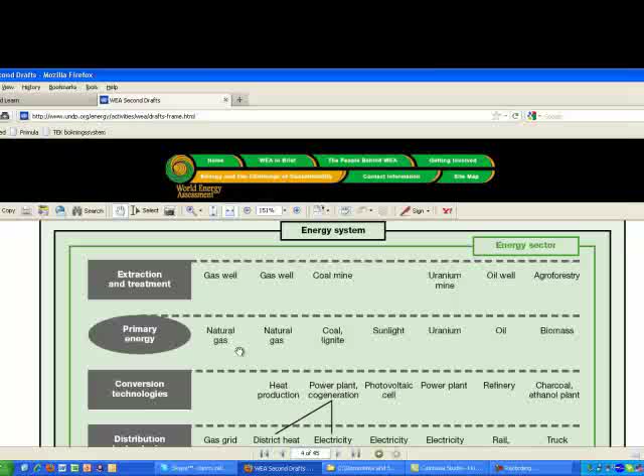Now this is Figure 6.1, which deals with energy conversion steps, types of energy and energy services, and potentials for energy efficiency. The figure starts with the raw materials, extraction and treatment of the primary energy carrier, be that gas or coal, uranium or oil, or biofuels, as noted here with the word agroforestry. The primary energy is then the biomass in our case, as shown in the right-hand side end. And that is what you shall ultimately come down to, what biomass is best used for the customer and for the customer's need. But in this course you will start from the other end. You will start from the customer perspective.

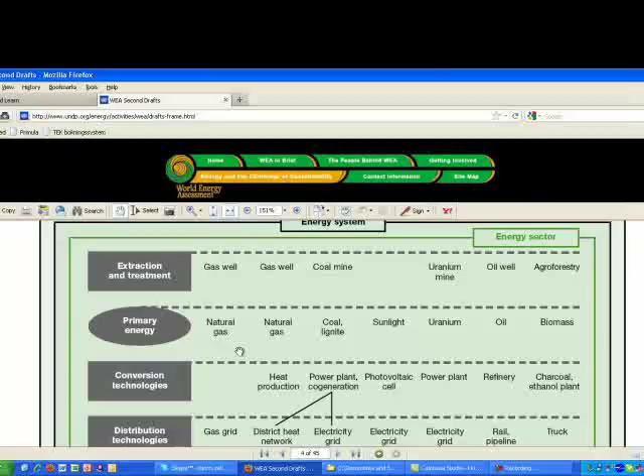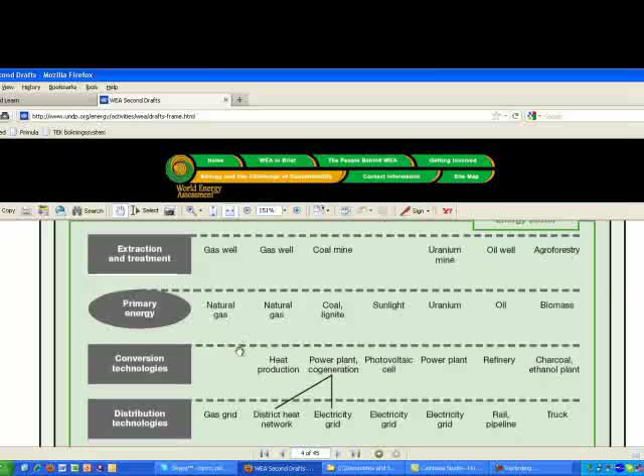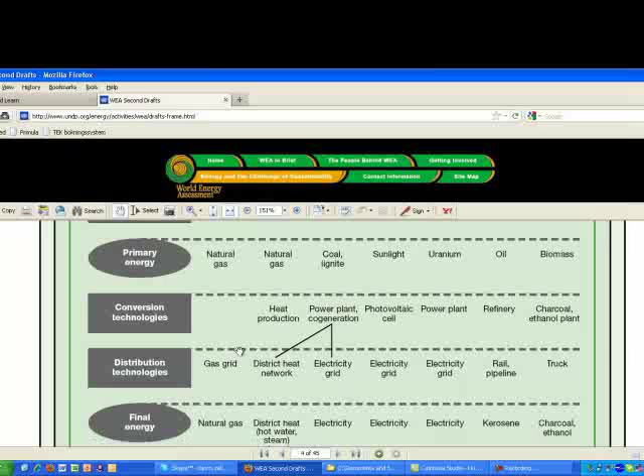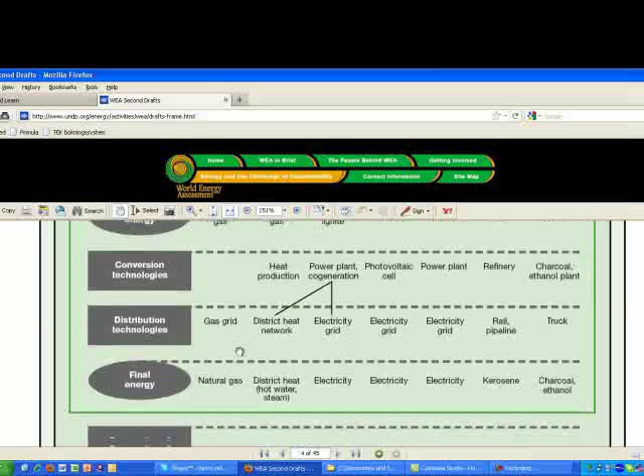Right now we will go down through this figure successively and have a look at the different steps that come between the extraction and treatment until the customer finally gets the energy. So you notice that we start with extraction and treatment. We then get a primary energy carrier, which is the biomass itself. It can be converted into something through a conversion process, which might be an upgrading, but might not be necessary. The fuel then, the upgraded fuel, must be distributed, and it can be distributed by different ways depending on the quality. And it will finally give us something we call the final energy.

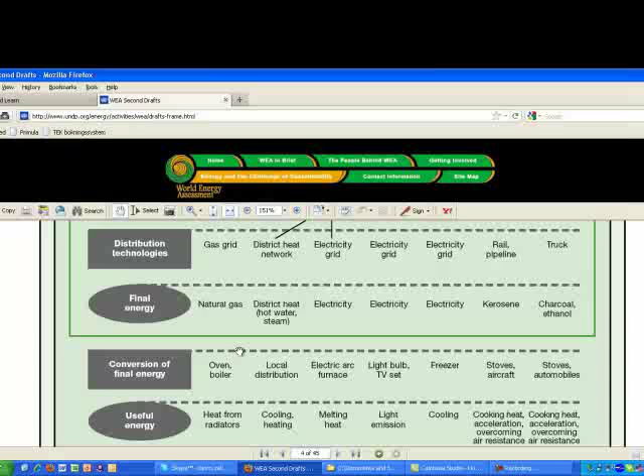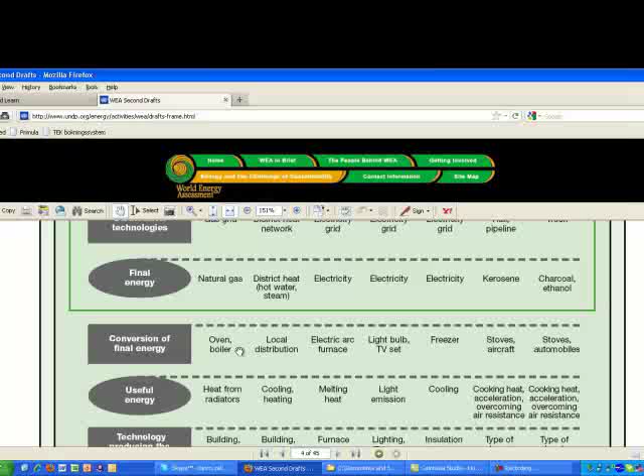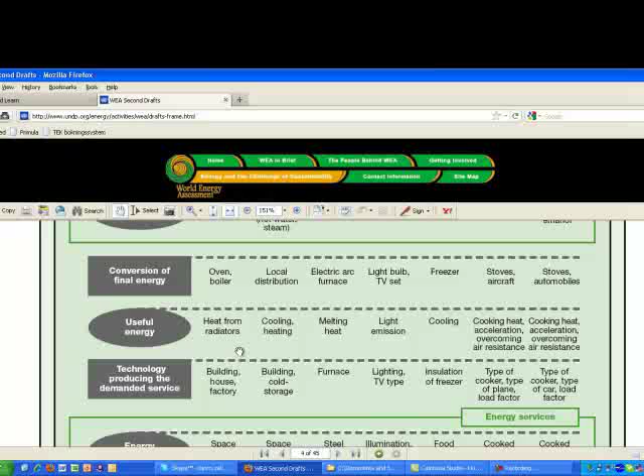You will notice the green frame that ends here. That is where the responsibility of the energy sector companies typically ends. So the energy sector will deliver a final energy, or a final energy carrier, to the customer or to a distribution network. The final energy carrier, be that charcoal or ethanol or electricity or district heat or anything else, is then converted into the final useful energy by the customer. And that can be done in an oven, in a boiler. It can be done in an electric arc furnace, a light bulb, TV set, a freezer, a stove, or anything.

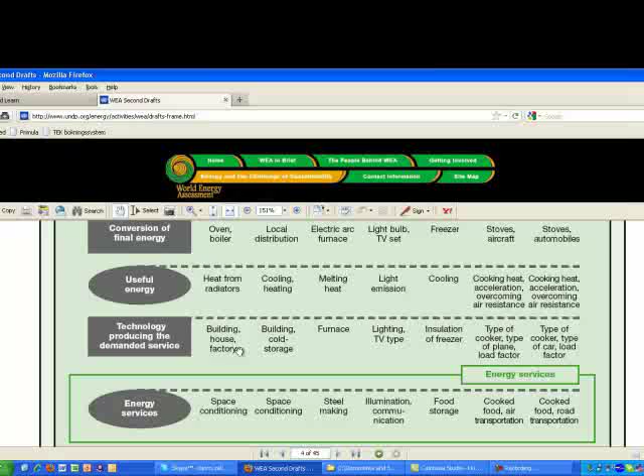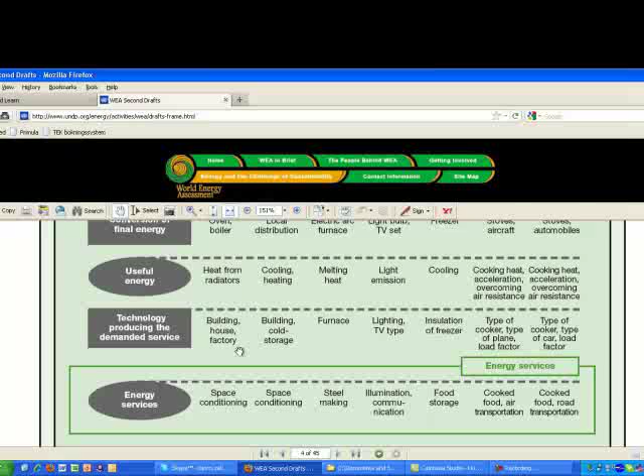That gives the customer a useful energy, which is then heat from radiators, or cooling, or heat for melting of metals, or maybe for burning ceramics, or maybe cooling, or something else. This is still not what the customer ultimately wants, but at the bottom line of this picture, you will now see what the customer actually wants, and that is an energy service. The customer might want space conditioning, space comfort heating, indoor climate. The customer might want to make steel, or to have molten steel, molten glass, or burnt ceramics.

The customer might want to have food preservation, or maybe cooked food. The customer wants a service. The customer does not want energy as such. So the customer will have a need of an energy service.

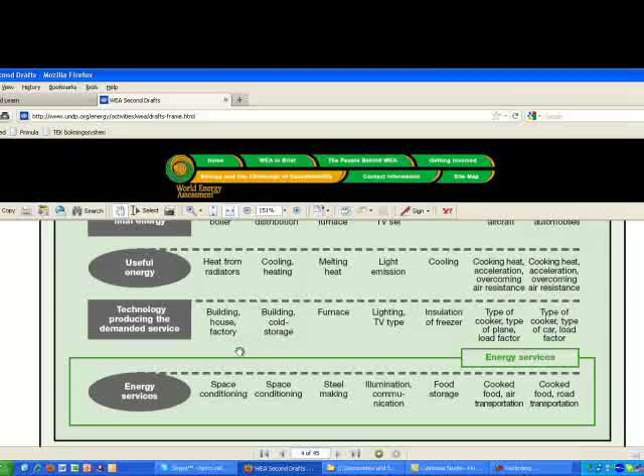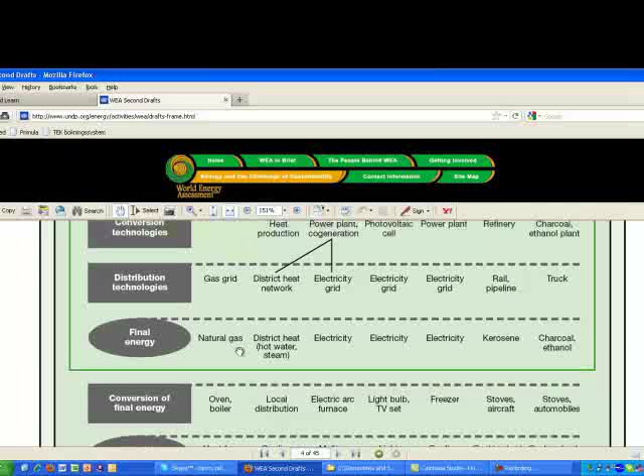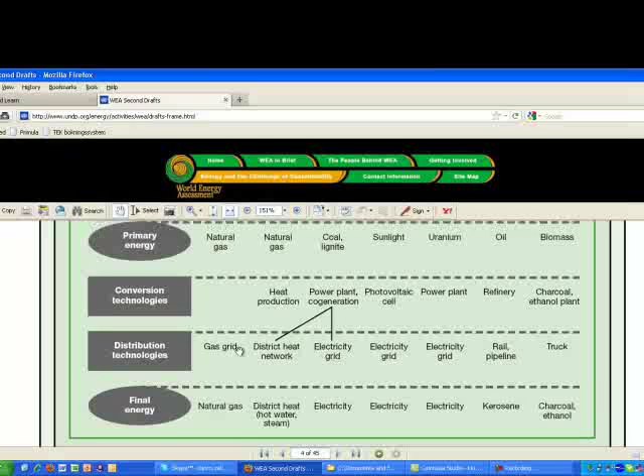The customer might or might not have some kind of a conversion apparatus for the conversion of final energy carrier into useful energy. That apparatus, that machine, whatever it is, that equipment, might be fitted for a certain type of energy carrier. That energy carrier might be best produced using a certain conversion technology. That conversion technology might be best suited for a certain primary energy carrier, which will then go back into what kind of raw material shall be extracted and how it shall be pre-treated to fit the final need.

So what you shall do in this course is that you shall work your way through, starting at the customer need of an energy service, and you shall go all the way back through this chain to the raw material that is best suited for that type of energy service. This is the other way than many people often think of energy supply systems. Very often, energy supply system planning starts with the raw material and then tries to fit the raw material into an already existing chain. But you have another situation, because you are now starting a new supply chain from a new raw material that has previously not been used to any great extent in your energy system.

So what you shall do is that you shall try to identify a market segment where the customer need is best supplied from a raw material that you have, and you shall identify the whole process chain. But you shall start with a customer perspective. What is the customer need of energy services? So the first thing you shall do in this course is to identify the customer energy services and the need of energy services. So that is your first task.

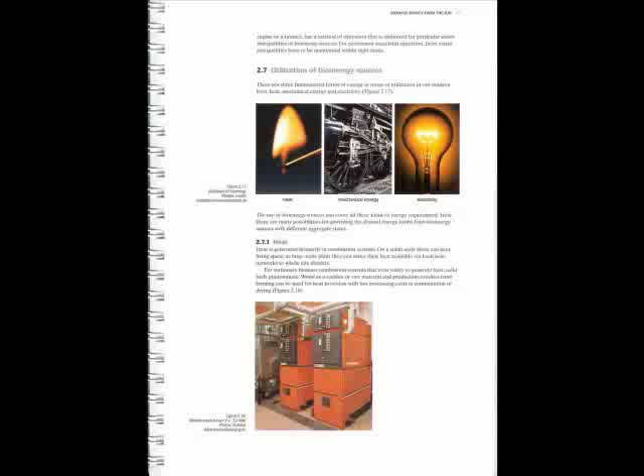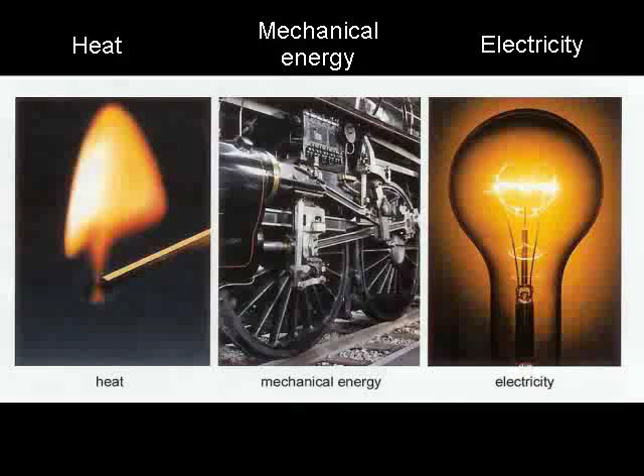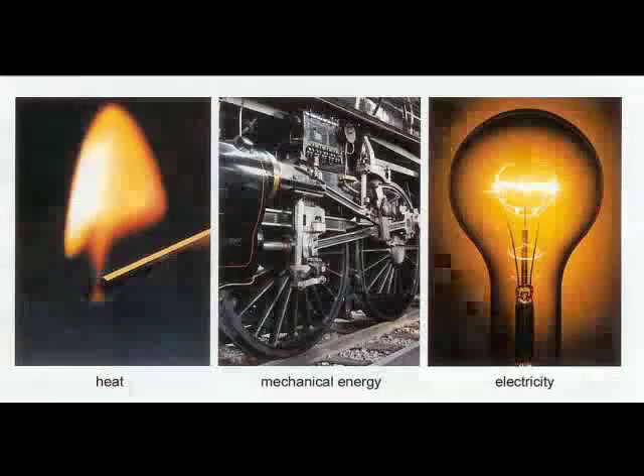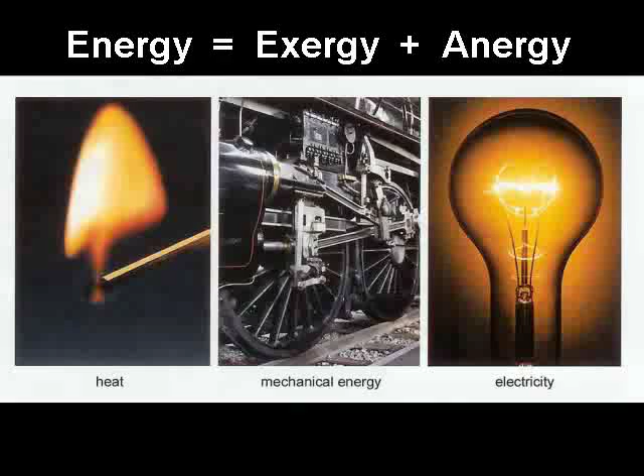The course book then defines that there are mainly three different types of primary energy to be produced, and that is heat, mechanical energy, and electricity. And then it discusses these on pages 17 and 18, but not in any great detail. We shall now have a look at the heat and see how heat can be split into different types and different qualities, and we shall introduce two fundamental thermodynamic terms, namely exergy and anergy, which are not mentioned in the course book at all, but which you need to know before you go out to try to identify the customer's needs of energy services.

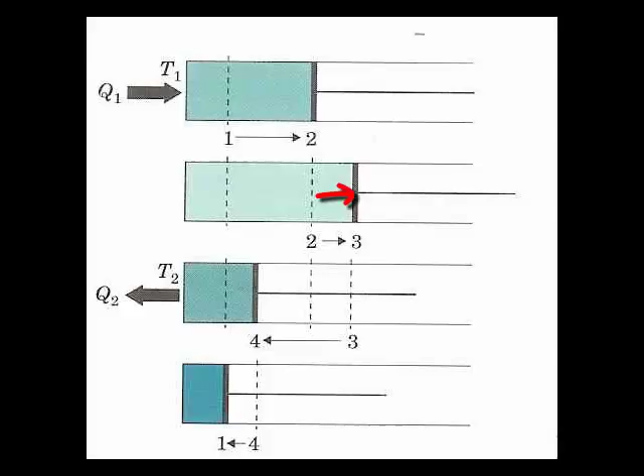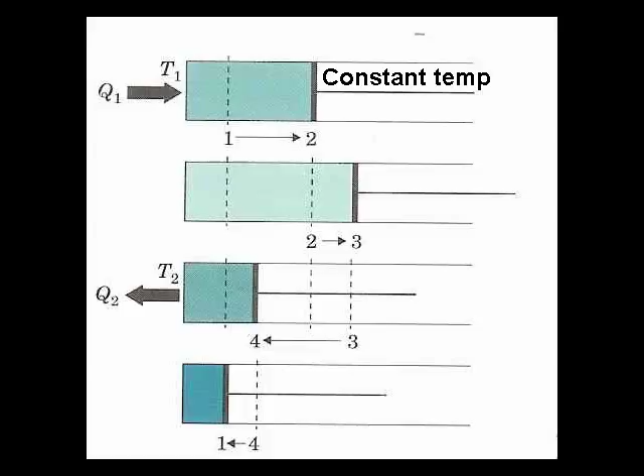As the gas is heated, it will expand, and it is assumed that the gas expands at a constant temperature T sub 1 until the piston has moved to position 2. After that, the gas is again allowed to expand further until the piston is in position 3, but during this expansion the gas may lose temperature. So the first expansion from 1 to 2 is at a constant temperature T sub 1, while the second expansion from 2 to 3 is while the gas loses temperature. This is indicated by the slightly bluer color in the diagram.

As the gas has now expanded and the piston has moved from position 1 to position 3, there has been external work done by the moving of the piston. So that work can be used theoretically to, for example, turn around a generator or something else for any kind of mechanical work.

So the piston is now in position 3 and the gas has some kind of a temperature. Now the third stage in the cycle is that we bring the cylinder into contact with the cooling source so that we start extracting temperature from the cylinder, and the amount of energy that we extract is Q sub 2. As the gas then cools down, it will shrink, and the piston will move from position 3 to position 4. The gas will now have temperature T sub 2 in the cylinder,

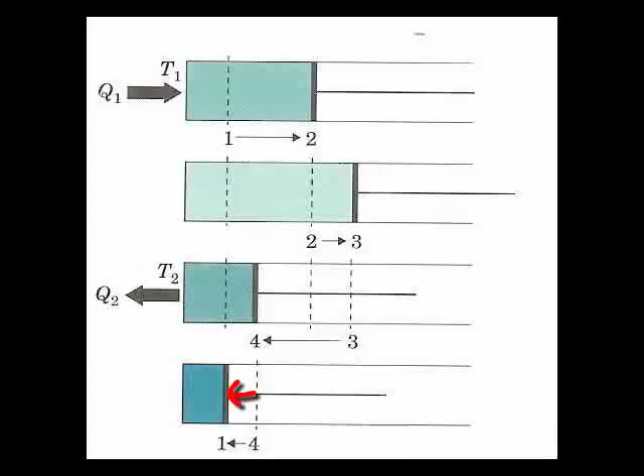and then finally we move the piston, so we compress by adding external work to the piston. We compress the gas, moving the piston from position 4 to position 1. The cylinder is now thermally insulated, and as we compress the gas, the temperature will again increase, and we assume that the temperature increases back to the starting temperature, T sub 1.

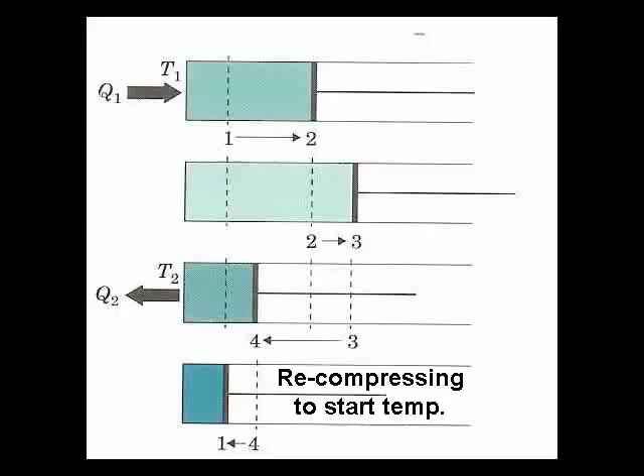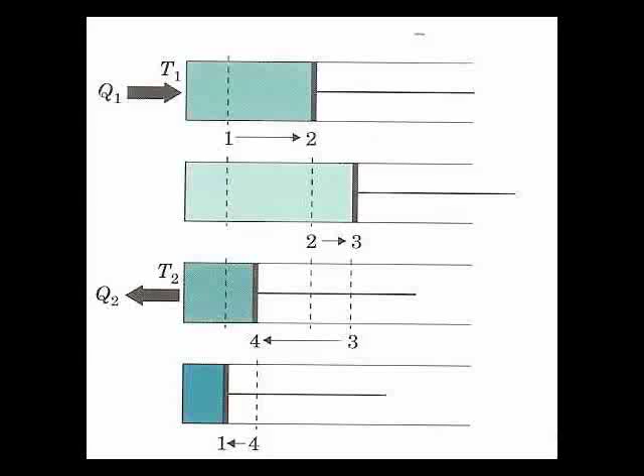So the amount of compression, that is the relation between positions 4 and 1, is such as to bring the gas back from temperature T sub 2 to temperature T sub 1, which was the starting point. Then this cycle can be repeated over and over again, and this cycle is called the Carnot cycle.

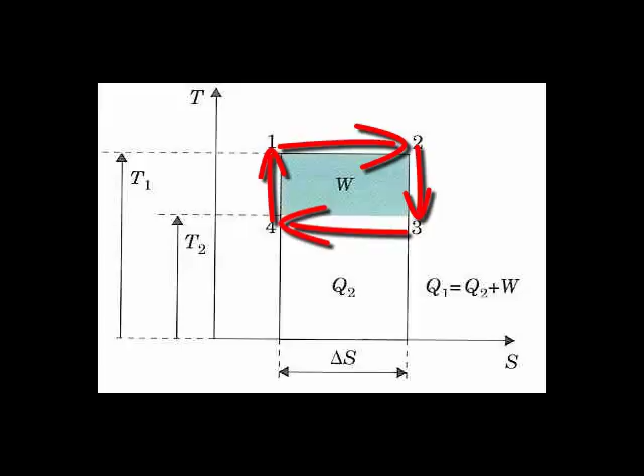The Carnot cycle, as illustrated in this diagram with the two axes T for temperature and S for entropy, shows us how much mechanical work can be extracted from an ideal gas engine when the working medium in the engine, the gas, cycles between the two temperatures T sub 1 and T sub 2. Into the engine is also put heat energy, the amount equal to Q sub 1. And the total amount of mechanical work that can be extracted from such an engine is the quantity W.

Now, this makes it possible to express the Carnot efficiency, and you will notice that the Carnot efficiency is a function only of the two temperatures, at the heating source and the cooling side of the engine. This Carnot efficiency is the simplest way to introduce the fundamental concept of exergy, and it is a very fundamental quantity valid for any kind of heat engine that works between two temperatures.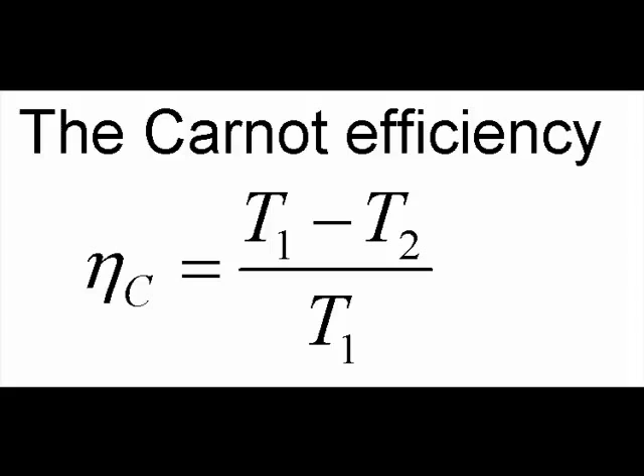So, we have now defined the Carnot efficiency, which is a simple measure of what fraction of exergy is present in a certain fuel. Now, the exergy content is not a fundamental thermodynamical property that goes with the fuel, but the exergy is actually a thermodynamical function of state, because it is dependent also on the surrounding. However, we will now regard exergy in the forthcoming discussion in a surrounding where the temperature is always 20 degrees C.

Now, before we go into looking at temperature and heat as a service, we shall remind ourselves that our customers are never actually willing to pay for oil or coal or gasoline or electricity per se, but the reason that the customer is willing to pay is because these energy carriers can provide a certain energy service, and it's the service that the customer is paying for.

Now the textbook in section 2.7 did put the finger on 3 different types of energy products. That is heat, but the textbook was concentrating only on comfort heat and domestic heating, and we will widen that scope now a little bit. The textbook points out mechanical work, and in modern society that is mainly the operation of cars and transportation fuels. And then the textbook points out electricity, which is commonly regarded as the major product. Now we will turn this reasoning a little bit upside down.

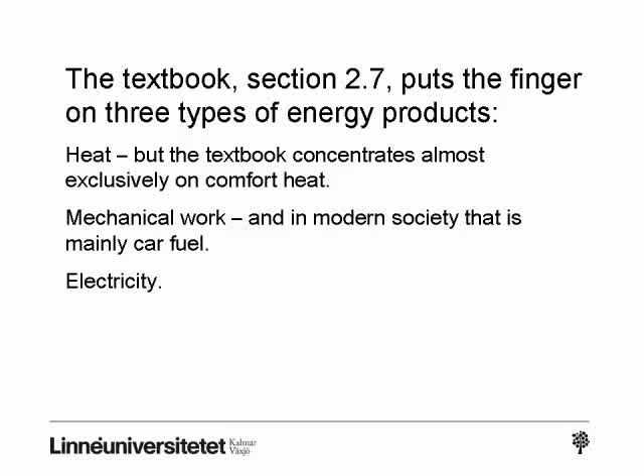Producing electricity from fuel will always produce surplus heat. That follows from the simple fact that only the part of the energy that is exergy can be converted into electricity, and the rest of the energy content of the fuel will always be lost, no matter what process you use. So if you start with a fuel that has a low exergy content, then the total efficiency in your electricity production will by necessity be very low. Hence, you should only produce electricity if you can find a use for the surplus heat.

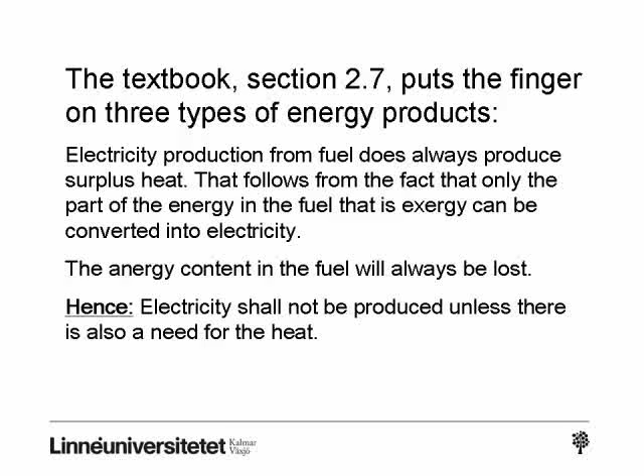Basically, the same thing holds true for the production of car fuels. The idea with upgrading something into a car fuel is that in the car fuel you want to have the highest possible concentration of exergy. And that means that if you start from a fuel that has a low fraction of exergy and you want to convert that into a fuel that has a high concentration of exergy, then you will lose the rest of the energy. So there will be a heat loss. And just like with electricity production, you should only go for the production of a car fuel if you can find a market for the heat lost.

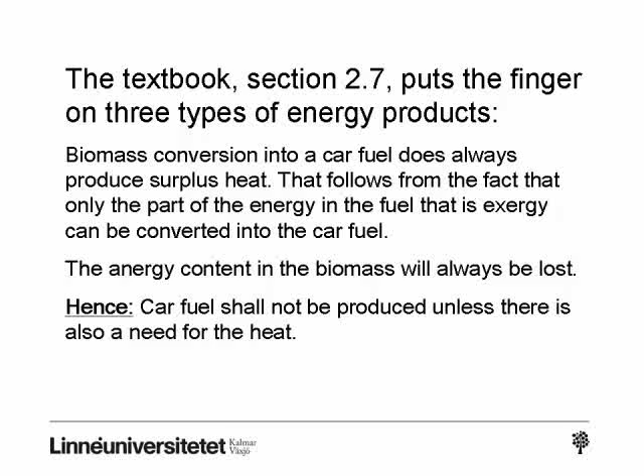Basically, this reasoning holds true also for biochemical conversion processes, but in these cases there is a heat loss which is at about 37 to 40 degrees C, and the remaining energy loss is in the form of carbon loss, which is still left in the residues from the digestion process or from the fermentation process.

Now, here we will concentrate on thermal conversion, and in these cases the heat loss is available at a higher temperature. Biochemical conversion is different, but the main reasoning in this lecture is based on thermal processes and not on biochemical conversion processes. So any type of high efficiency energy process will demand basically that there is a heat sink available to take care of the energy losses.

Now the quality of this heat loss, of the surplus heat, may to some extent be set by process design, and to some extent so may the total power, the total amount of surplus heat. But you can never avoid having heat losses when you're treating a fuel, whether you want to produce electricity or you want to upgrade the fuel into, for example, a car fuel.

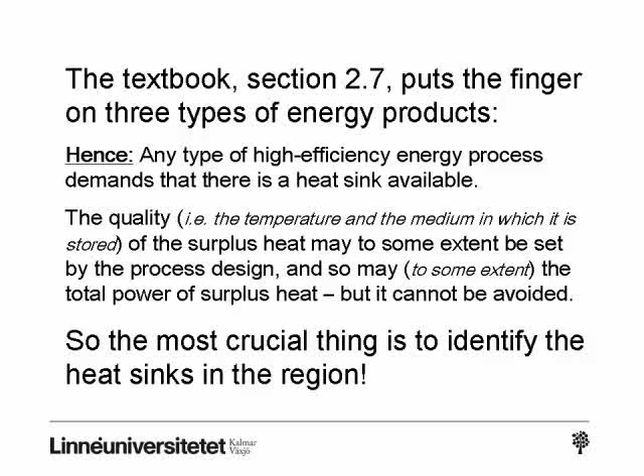So to get an economically viable process, the most crucial thing is to identify a market for the heat, and to do that you have to identify the heat sinks that are available in the region. To identify the different heat sinks, we shall start with the temperature axis extending from minus 273 degrees C up to 2000 degrees Celsius. This is the range in which we can find different types of energy services that are directed or can be characterized by temperature.

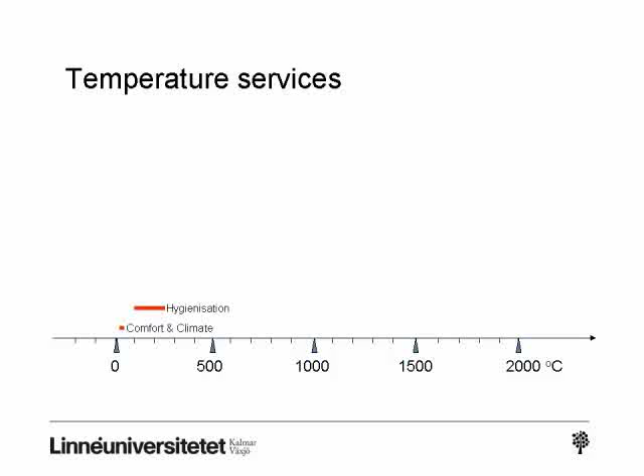Starting with comfort and climate heating, that's only around 20 degrees Celsius and nothing else. Whereas hygienization processes, for example within the food processing industry, might extend from say plus 100 degrees up to about plus 250 to 300 degrees. Food preservation and processing extends from freezing temperatures, say minus 50, up to about 300 degrees for heating and heat treatment. Whereas steam for electricity production ranges from about 300 degrees up to about 600 degrees, 550 to 600 in modern steam applications.

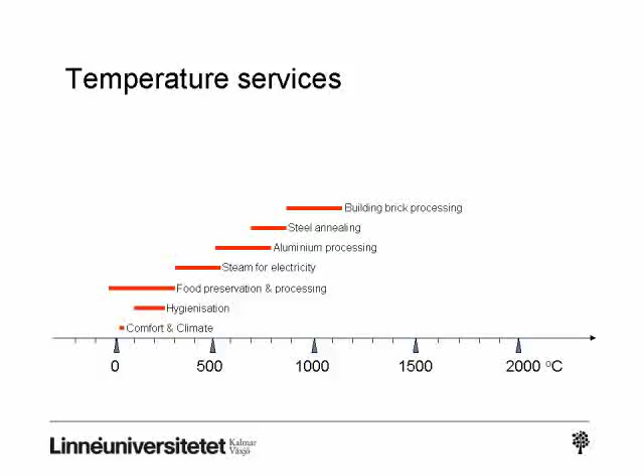Aluminium processing extends from about 500 degrees up to around 800 degrees, whereas the annealing of steel requires higher temperatures, from about 700 to 900 degrees C. The production of building brick occurs at temperatures around 850 up to about 1100 degrees C. Glass processing, depending on the glass quality, from about 1000 degrees up to 1600 degrees. Cement production from about 1300 up to 1600 degrees. Steel making from about 1400 up to about 1750 degrees C. So there's a range of different types of temperatures that need services.

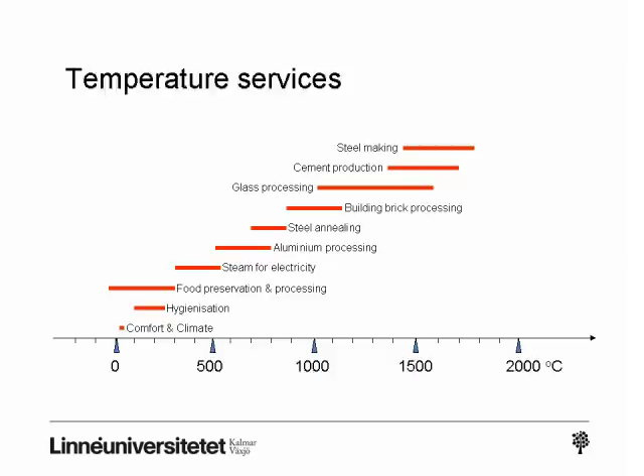And changing now the scale from temperature into the fraction of exergy in the fuel or in the process needed to run the process, if we fix the surrounding temperature at about 20 degrees C and we then calculate the Carnot efficiency for the different temperatures, you will notice that we get a negative exergy, minus 6.8% exergy at 0 degrees. We get 62.1% exergy as a demand for processes that shall run at 500 degrees C, and we get 77% exergy demand for processes that shall run at 1000 degrees, up to 87% for processes running at 2000 degrees.

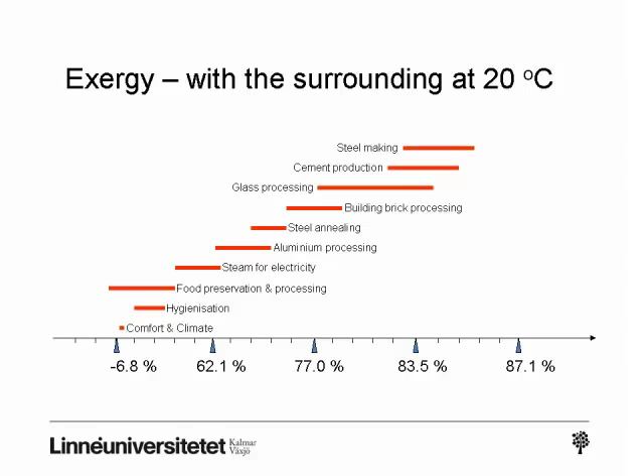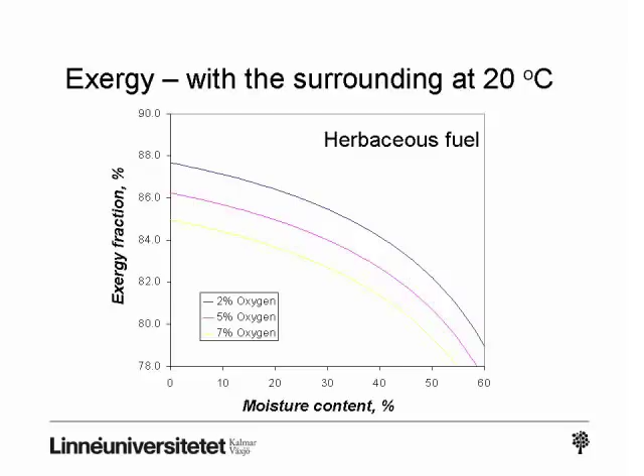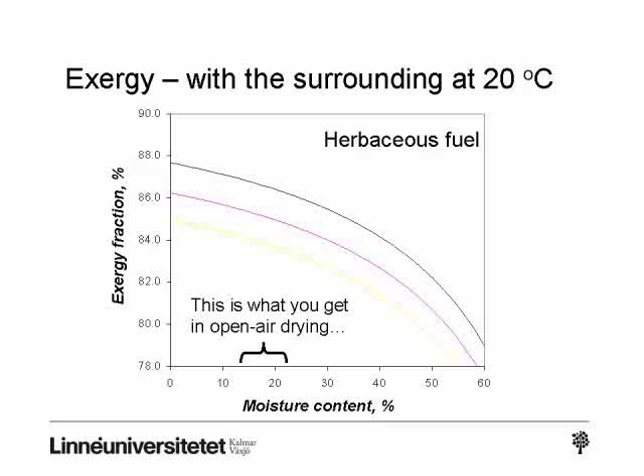Looking now at what can be achieved by open air drying, we typically end up with a fuel with something in between 13 up to a little bit more than 20% moisture content. And that means that we would typically arrive at exergy contents exceeding about 84%. So basically any biofuel will work for any process that requires less than about 84% exergy. So at least up to 77% exergy, which is equal to 1000 degrees process temperature, we can use basically any biofuel.

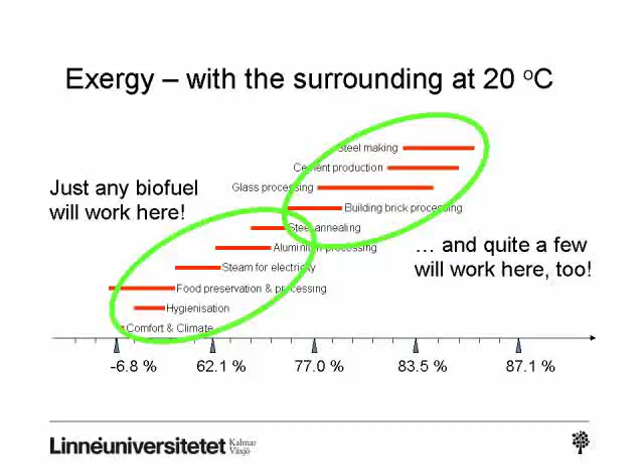Whereas quite a few biofuels will work also for the highest temperatures, the highest amounts of exergy. So biofuel can be used to provide energy services up to temperatures around more than 1500 degrees, not only for comfort and climate heating.

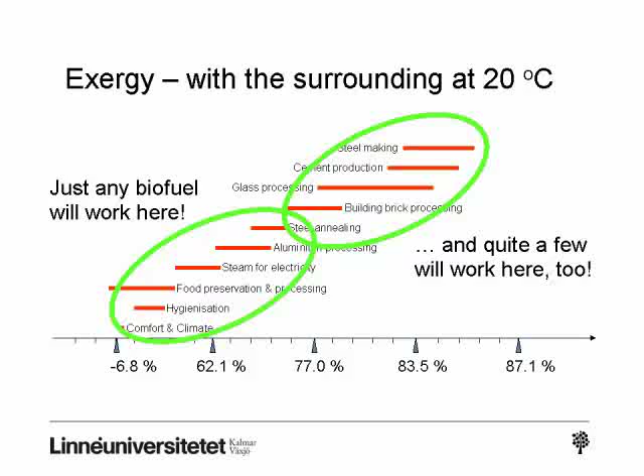However, there are some limits that need to be taken into account when you want to figure out where biofuel is most competitive. At about 50% exergy, about 300 degrees C, there is the first limit. Because to arrive at only 300 degrees C on a sunny day, you need only concentrate the solar irradiation 30-fold. So for temperatures below about 300 degrees C, solar energy might well be very competitive to biofuel installations. This is, of course, unless other factors are determining.

If you want to use solar energy, then you will have to accept that it might be intermittent. It will not be available during night. It will not be available on cloudy days. So if you are demanding a reliable supply, then solar heating is not an alternative, even for these low temperatures. But then you might well have biofuel as the main alternative.

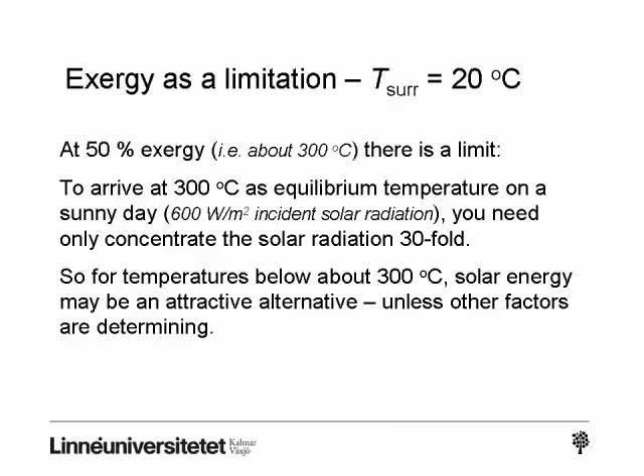For cooling, the limit looks a little bit different. For cooling production from fuel firing to be very efficient, you need to get rid of a lot of surplus heat. And unless you can sell that heat, most probably your process will not be economically viable. Hence, you need a heat sink close to the cooling production facility. And if this cannot be arranged, then the cooling should be produced using compressor coolers, and the biofuel should then be used in a CHP plant.

But that depends entirely on where the cooling need is situated geographically as compared to the heating need. So for cooling production, you will end up with very specific requirements on the geographical area. You need a cooling sink or a cooling customer, and you need a heat sink or heat customers to be present in the same area. Otherwise, cooling production from fuel firing is not a good alternative.

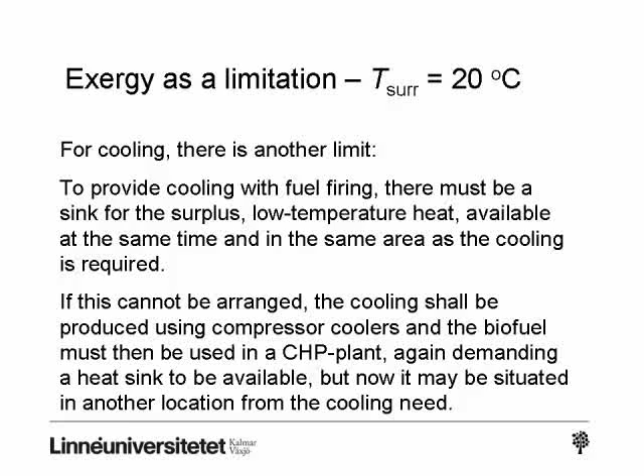So then, what you shall do for your own region is to identify the total cooling power needed at temperatures from, say, +5 degrees up to ambient. You should identify the total power needed to provide heating temperatures from, say, about ambient up to 300 degrees. You shall identify the total power needed to provide temperatures between, say, 300 degrees and 1200 degrees C. For these temperatures, we can use any biofuel basically, and solar heating is not a competitor in this temperature range.

You shall also identify the total power in watts needed to provide temperatures exceeding 1200 degrees C. To arrive at these temperatures, we would need to upgrade the biofuel and not to use the raw fuel as such. You shall also identify the limiting factors for the willingness to pay for these different types of energy services, I should say. Is the limiting factor the reliability of the supply? Is the willingness to pay limited by the cost of the energy or the energy service? Is there anything else, like local environmental considerations? You have to identify that for your own region.

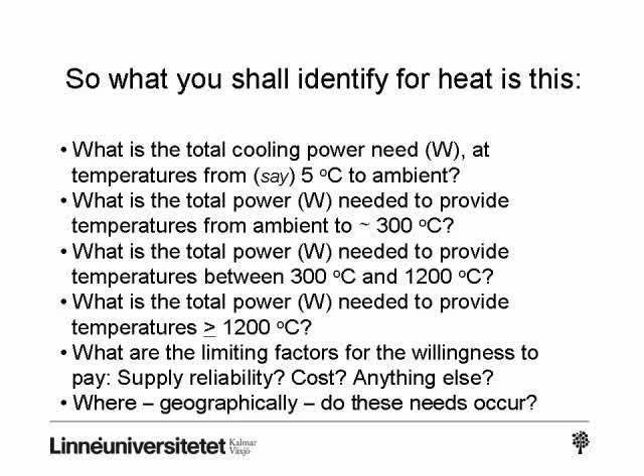And finally, you also have to identify where geographically these needs occur, so that we can ultimately identify any co-production options and synergy effects. And then once the market is defined and split into these different energy services, you can ask yourselves, and we shall ask ourselves together, how much electricity can we produce based on the heat sinks? Or how much car fuel? Or how much cooling can we produce based on the heat sinks? And what is the limiting volume of other types of byproducts to make full use of these heat sinks? So the heat sinks will be determining factors for the amount of energy, the quality of energy and the type of installations to be identified.

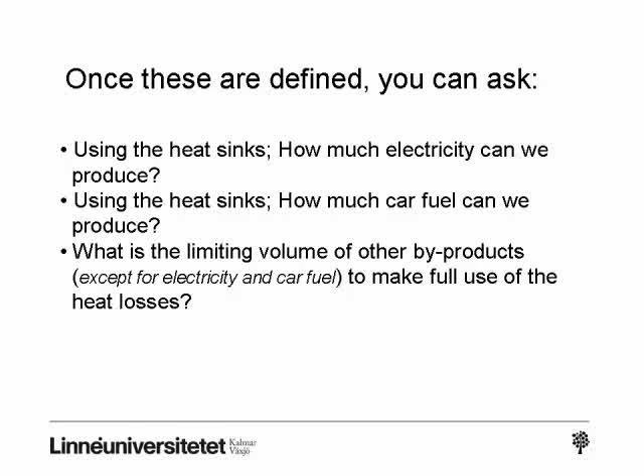Now, the third bullet of these is the one that is open for imagination and for innovative thinking. And you may well, even from the beginning, start to suggest alternate uses, but it all has to be based on a sound use of the surplus heat, and therefore you need to identify the market for heat as an energy service before we can go on into the technologies and into the supply system needed to provide this.